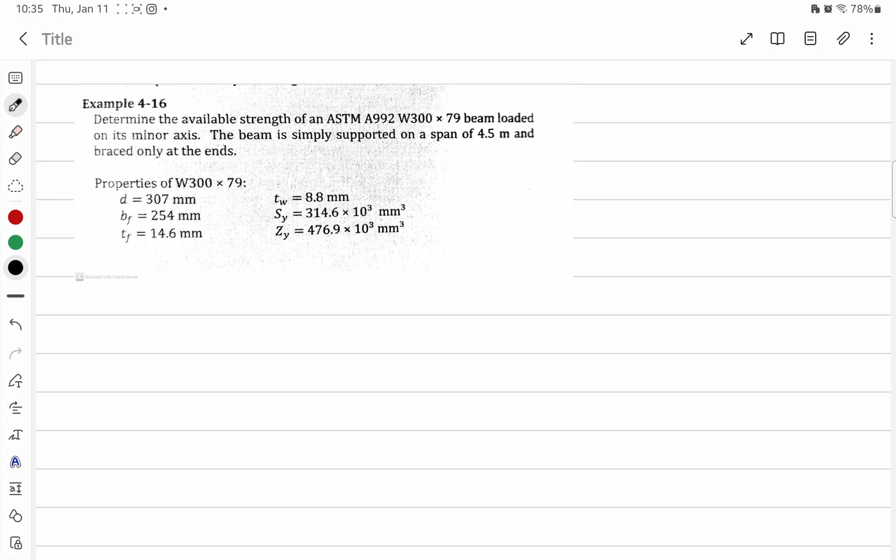Example for weak axis bending or minor axis bending. Determine the available strength of ASTM A992 W300 by 79 beam loaded on its minor axis. The beam is simply supported on a span of 4.5 meters and braced only at the ends. Since we say available, this means we need both design methods, LRFD and ASD.

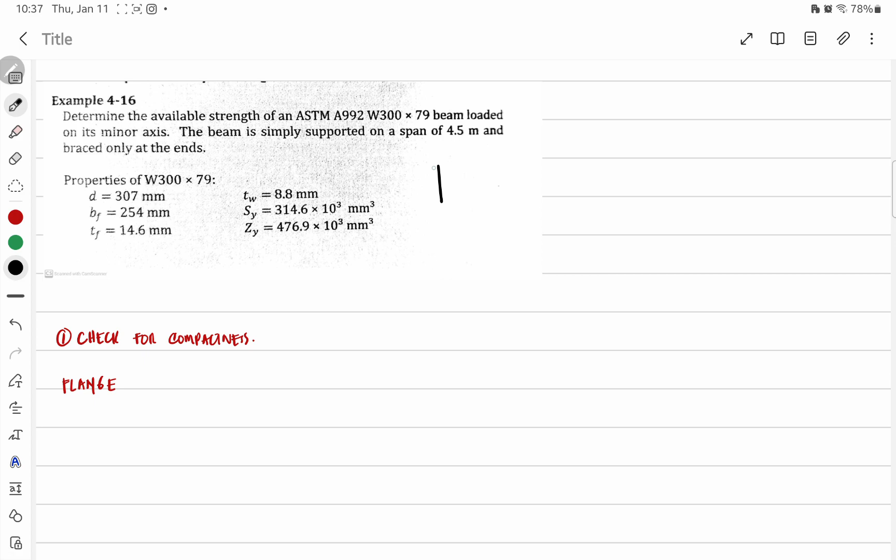For an I-section, we have 5 elements. First, 1, 2, 3, 4. For the flange, this is the check we use: BF over 2TF.

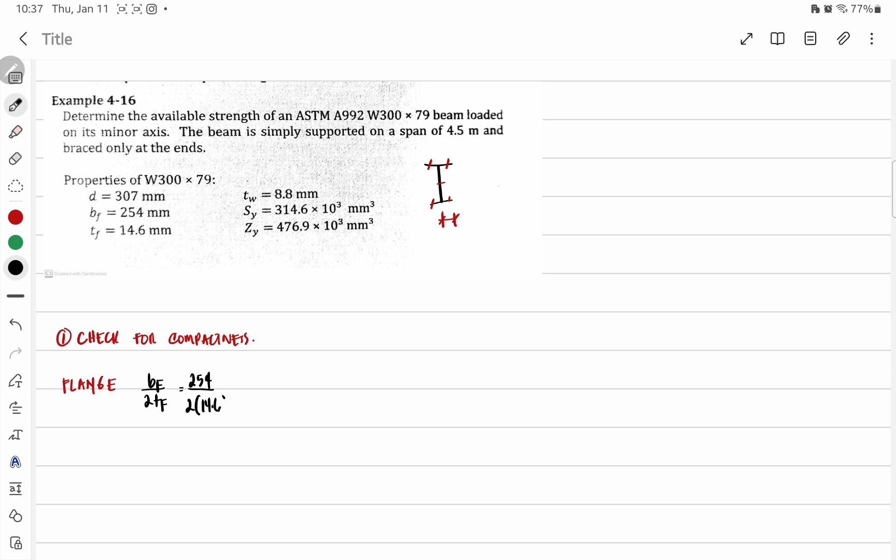What is the base of the flange? 254. We have 254 over 2. TF is 14.6. For that, we get 8.7.

Our criteria here is 0.38 times the square root of E over Fy, and this should be less than that. So what is 0.38? We know E is 200,000.

Fy is - is that the Fy given? ASTM A992. For ASTM A992, that is 345 megapascal. And this equals 9.15. Since we satisfy the criteria, that is greater than 8.7, therefore this is compact.

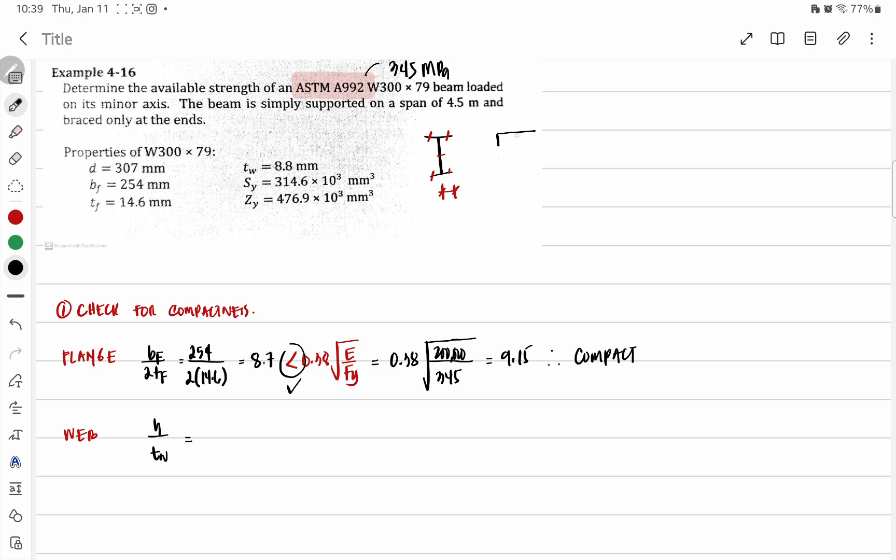The flange is compact. How about the web? For the web, we have H over TW. What is our H here? Just this part, right? Just this part is H.

If K-design is given, since this has a fillet like this, we use K-design, K-des, so that's it, that's our H. But if it's not given, you can just use D minus 2TF. So for our H, that is D, which is 307, minus 2 times the thickness of the flange, 14.6, over TW, which is 8.8 millimeter. We get 31.6 as the answer for this.

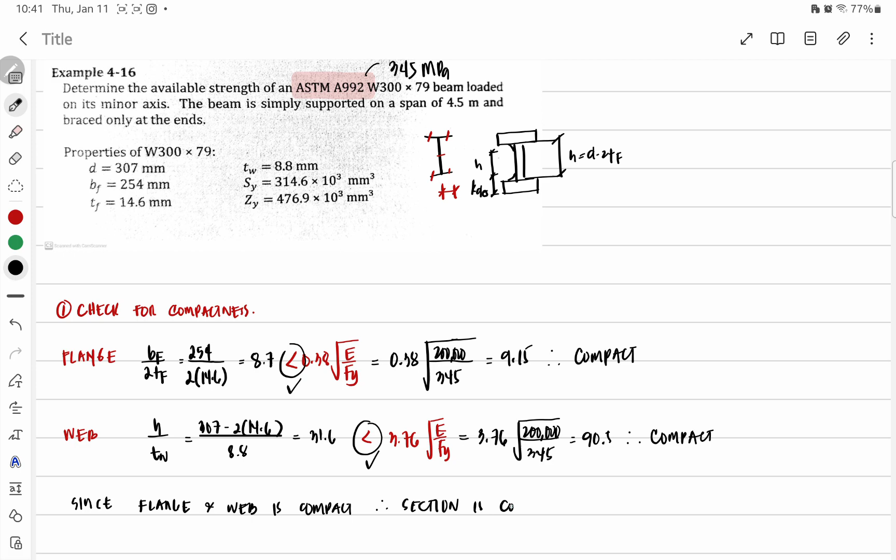Since both the web and the flange are compact, therefore our section is compact. Going back to this: if the section is compact, for compact shapes, MNY is equal to MPY, which is also equal to FYZ.

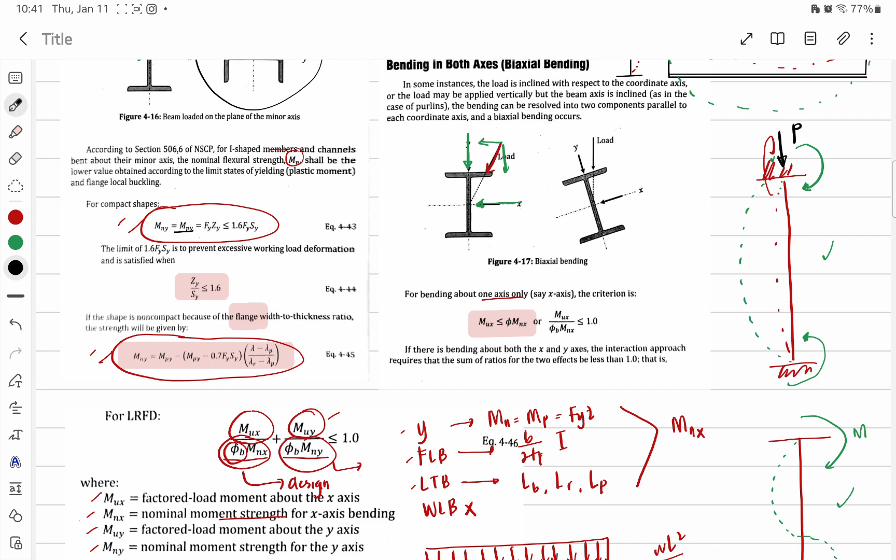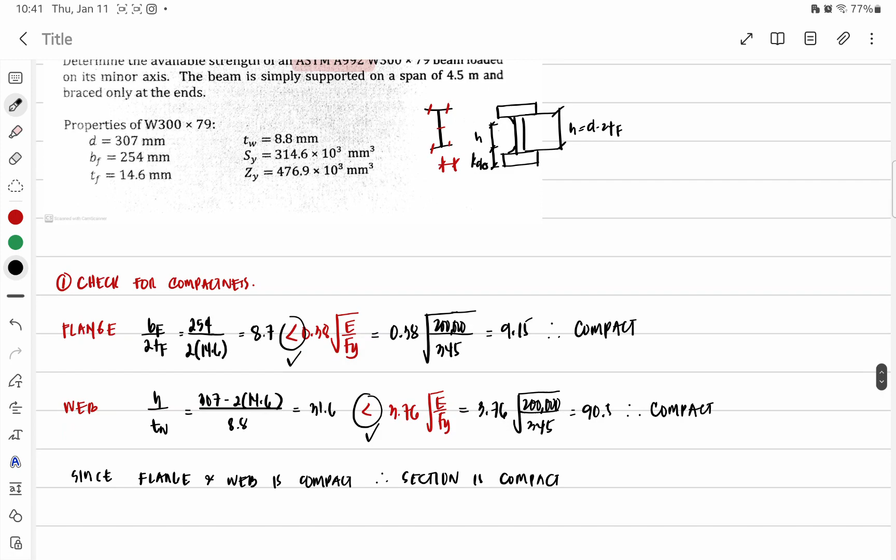Okay, let's solve. This should be less than or equal to 1.6 FYSY. So what is MNY again? MPY equals FYZY, which should be less than or equal to 1.6 FYSY.

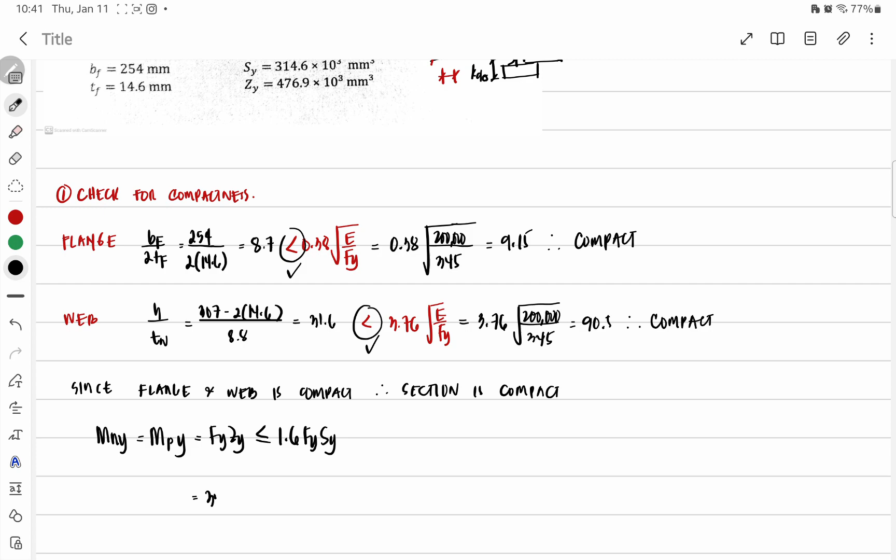Our Fy is 345. ZY is 476.9 times 10 raised to 3, given.

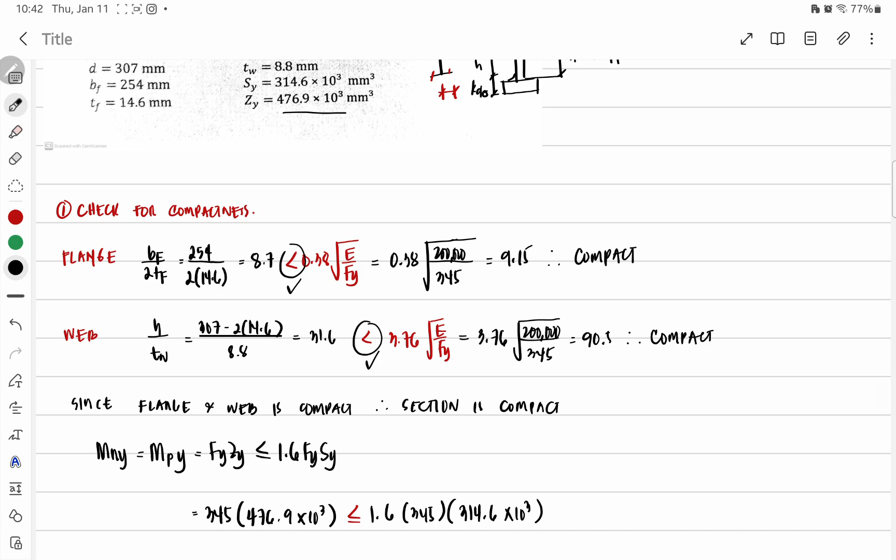This should be less than or equal to 1.6 times 345, SY is 314.6. So what is 345 times this? That gives 164.5 times 10 raised to 6 Newton millimeter.

Let's check this against the criteria, which is 173.7 times 10 raised to 6 Newton millimeter. Since this is smaller, therefore MNY is equal to 164.5 times 10 raised to 6. Are we good here?